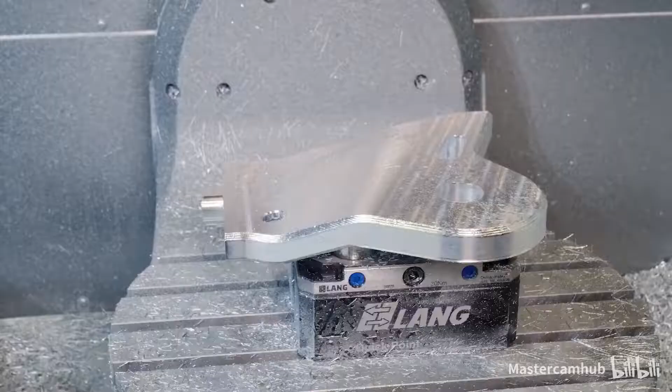Yeah, Keith Goodrich here, turning product owner at Mastercam, and our team, Team 24, is in charge of all things turning. So that includes everything from lathe on up to mill turn, your full-blown 5-axis dual spindle multi-stream machines.

So the technical preview and beta areas of our release cycle are really important to us. It gives us a chance to get something into the user's hands, and then they can give us feedback, what they like, what they don't like. And hopefully we'll have time before the release to actually make those modifications and get them what they're asking for.

Even before the technical preview area of the release cycle, we reach out to resellers and some customers who've reached out to us over the previous year. We talk about what their needs are for the year coming up, and we give them a glimpse of, this is what we're thinking for this release cycle. How would you feel about something like that? And it's a really iterative process going back and forth with customers, resellers, all kinds of different stakeholders.

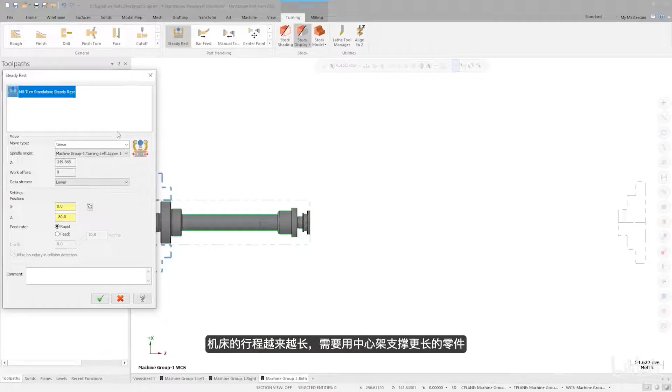2, maybe 3 years ago, we started working on work support components for Mastercam mill turn. We introduced SteadyRest last year, but there's so many people out there that have more than one SteadyRest. You get longer machines, you need to support those long work pieces. For Mastercam 2023, we really opened up the SteadyRest to support multiple tandem SteadyRests mounted on one block that move together, and also multiple independent SteadyRests that can have their own set of axes and move around the machine on their own.

In lathe, when you've got the part handling operations, you can define the tool plane that they're going to use, and the tool plane has a work offset that's associated with it. We've given users the ability in mill turn to set an active tool plane before creating their part handling operations. Then those part handling operations are going to use that tool plane, and if there's a work offset associated with it, they'll come out with the proper work offset.

So if you've, say, moved your part out 5 inches from where it previously was, and then you go to do a facing toolpath, if you're using the new tool plane with the proper work offset, your facing toolpath will be at Z0 in the posted code as you expect. It won't be 5 inches from where your previous work offset was. It's just a general quality of life improvement that people have been asking for a while.

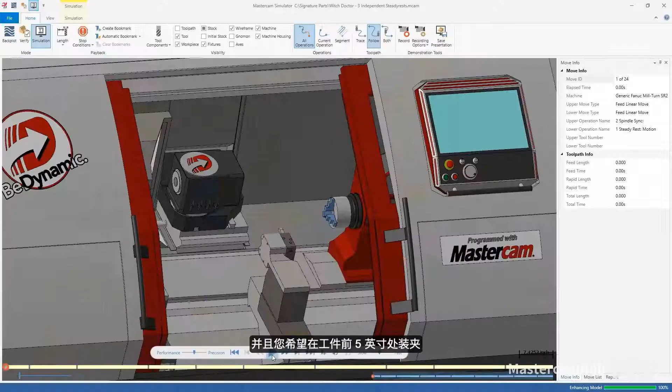If you're gripping the part in the right spindle with your SteadyRest and you want to be 5 inches in from the front of the part, you'd like to see that 5-inch value in the posted code. It's not referencing the left spindle as you're working on the right. You want to be able to assign the proper spindle to the SteadyRest operations where you're going to use them. These quality of life improvements make all the difference to the user. It's something that you don't think about unless you're missing it.

People have been asking for B-axis turning for a number of years in Mastercam. It's been a large project for us. It's multiple years, and we've got a great solution for Mastercam 2023. B-axis turning is extremely powerful because it allows you to cut the entire profile in one operation with one tool. Being able to rotate the tool while it's in the cut allows it to reach previously unreachable areas.

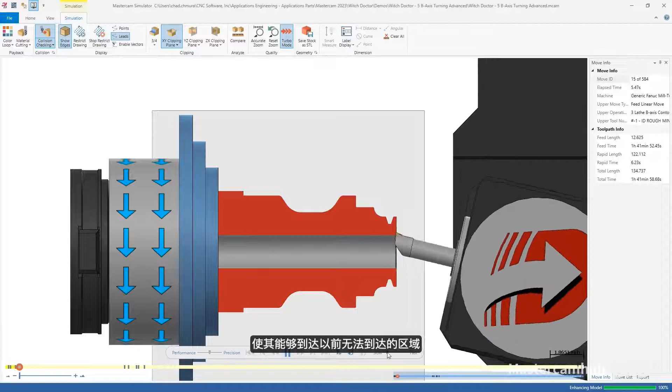You'd have to come in with a second tool and another entire operation and then deal with blending the operations together. It would just make a mess of your surface finish. But with B-axis rotating while you're in the cut, it's all one cut, so there's no more mismatch. For the first release of B-axis turning, we've got 2 modes. We've got automatic and manual.

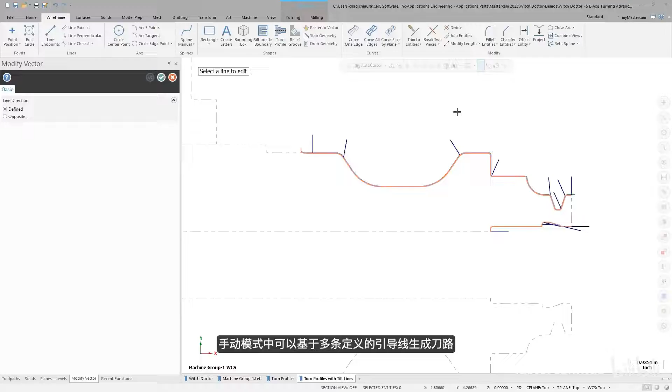Automatic is just like it sounds. You pick your contour, you pick your tool, and Mastercam's going to give you a good toolpath, and it's going to reach as much of the contour as physically possible within the tool angle limits that you've defined. Manual mode allows the users to define as many tool axis control lines as they want to control the orientation of the tool along the cut. If you know that you want to start at 90 degrees and then just rotate 10 degrees by the time you're at the end of the cut, 2 tool axis control lines is all that you'll need to get that done.

One of the most rewarding things that I've experienced is when you're in that technical preview or beta cycle and people are asking for new functionality to the new stuff that you've already given them. It shows us that they're excited about it, they're in there, they're using it, and they want more of what we've given them. So we're already hard at work for the next release on some good enhancements for it.

We take all feedback extremely seriously. We look at it together as a team and we decide on which items to act. And often when we do act on items, we'll find that original user and reach out to them and ask them, hey, we've acted on your feedback. What do you think about it? So that really closes the circle, and it's a great feeling for us. And I've got to assume it's an even better feeling for the user to know that they're helping shape Mastercam.